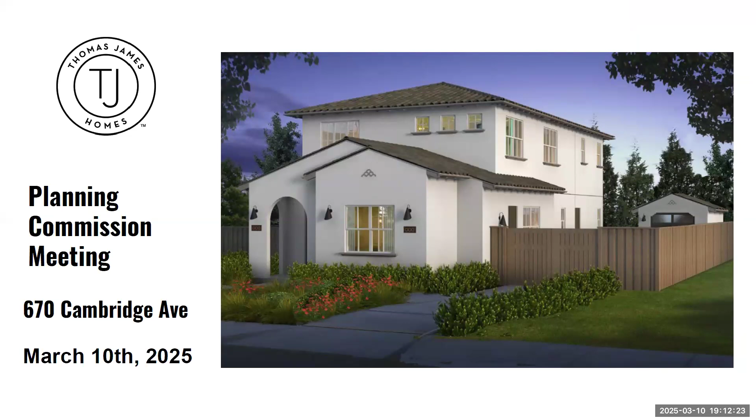Thank you, good evening to the Planning Commission. My name is Gagan Kang with Thomas James Homes. I'm a forward planning manager here. Thank you for the opportunity to present 670 Cambridge. We also have Dave Pocket, our project architect, on the Zoom call as well. Before I proceed further, Dave did want to go over one item.

Dave, are you able to speak into the mic? Is he able to present? Yeah, his microphone is unmuted, but I'm not hearing anything. Let me see. Mr. Kang, is it possible to proceed and maybe circle back? Yeah, let's do that.

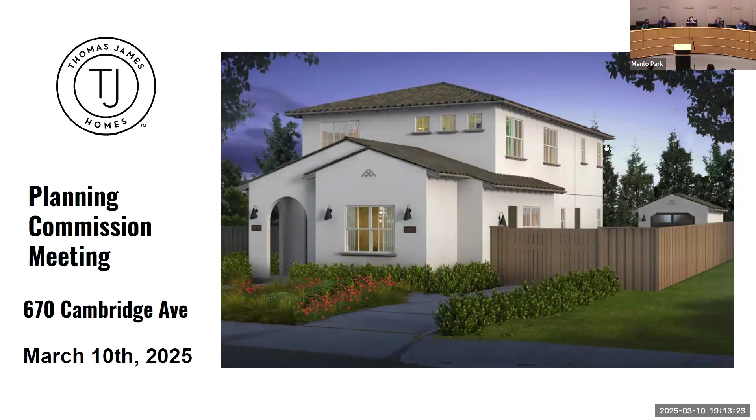Both the previous existing home and the proposed home have a detached garage, and this is commonly found in the surrounding neighborhoods.

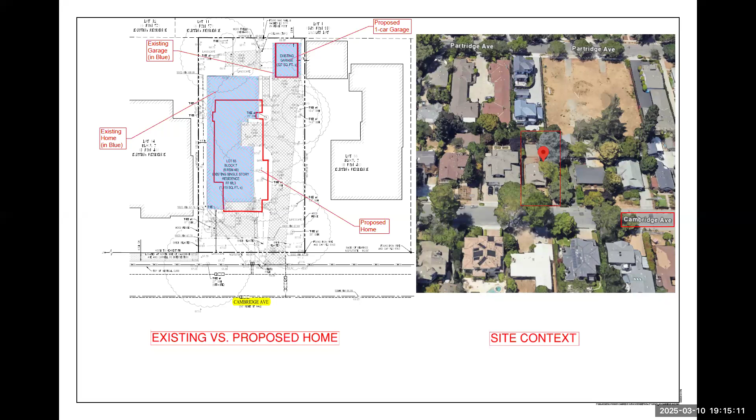As for site context, this is in the Allied Arts neighborhood, consisting of 1-story and 2-story homes, both renovated and new construction. There's a variety of materials, ranging from stucco to siding, board and batten, cedar, shingles. Several different elevations are used, such as modern, transitional, Spanish, craftsman, farmhouse, and some evolving transitional style homes that blend different elevations. There's also a mix of 1- and 2-car garages, so we wanted to copy what was existing and went with a 1-car garage here.

Apologies, Mr. Kang, is there any possibility you could move a bit closer to your microphone so we can hear you at full volume in the chamber?

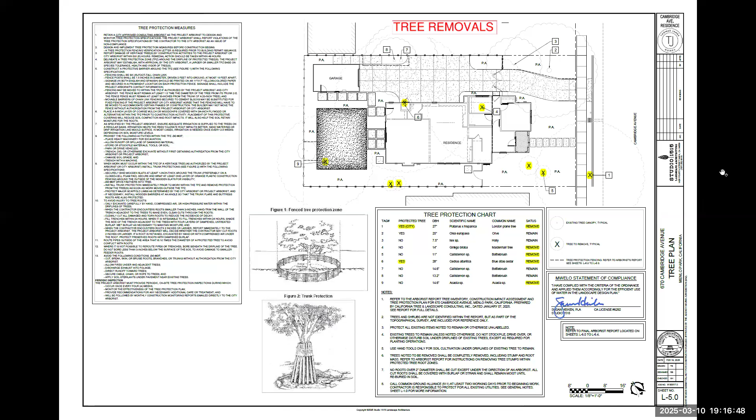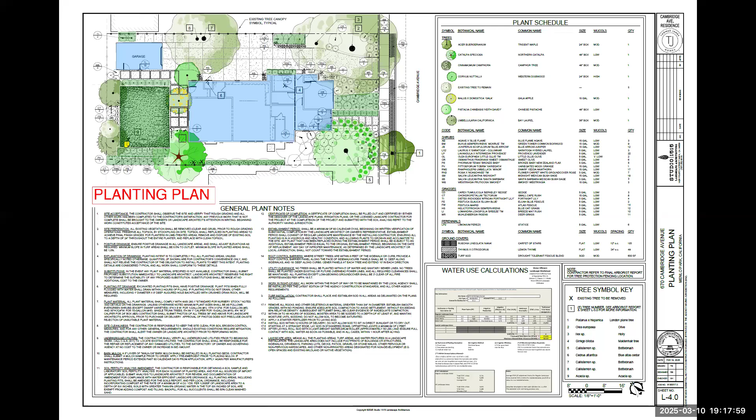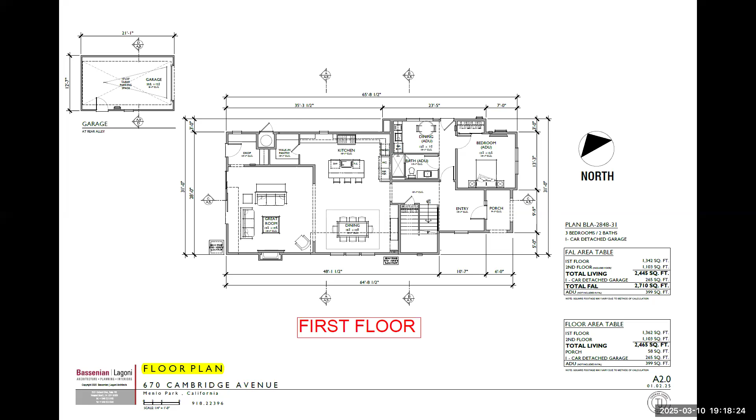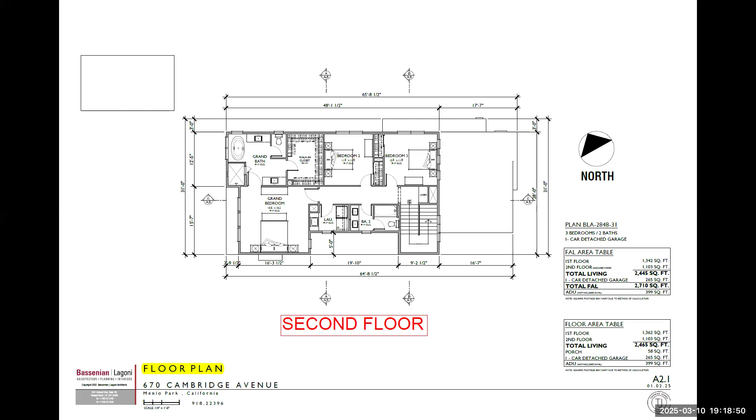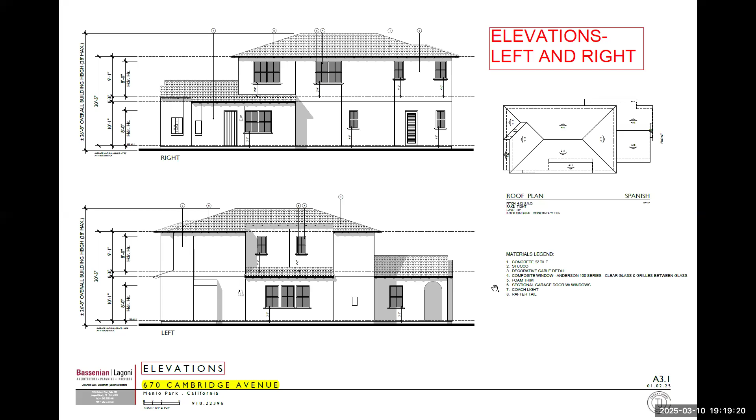At 670 Cambridge, we're proposing a Spanish style elevation, consisting of roof forms that are low pitched, both gable and hip. Overall this has an earth tone feel with the colors we chose. We are using concrete S-tiles for the roofing material.

The color palette is an off-white exterior stucco with a bit of tan to it, and a tad bit warmer brownish gray for the trim. Given the surrounding homes and neighborhood, we believe that this home proposed at 670 Cambridge goes well with the neighborhood.

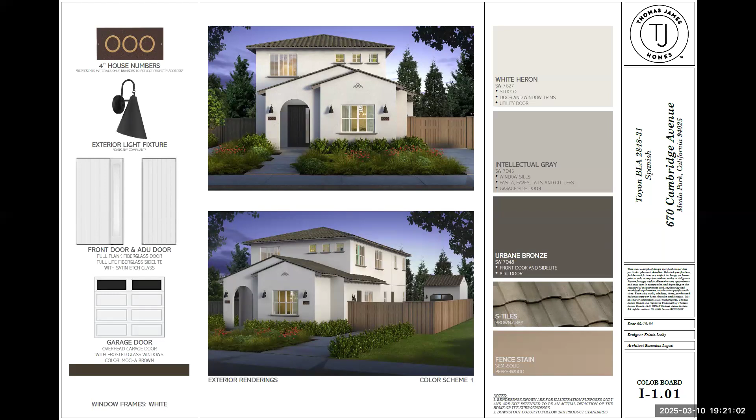And so that concludes our brief presentation. Myself from TJH and our project architect, Dave from Bassenian, are here to answer any questions you have.

Hopefully Dave's mic works now, and if not, I'll try my best to answer the questions. Can we try one more time to get Mr. Pocket on the mic, just so we can have him available for questions? Mr. Pocket, are you able to unmute your microphone?

Well, if it's okay with you, I can read his correction. There was a little correction we had to make. Quote unquote: I found a typo on our FAR on the floor plan sheet and the floor plan calculation sheets. The correct FAR of 2723 square feet is on the cover sheet. On our floor plans and square footage calculations, the total FAR is listed as 2710, which is incorrect. I found that the square footage polyline had taken out the water heater by the kitchen, which was an error. Again, the correct 2723 square feet proposed FAR is on the notes of the cover sheet. The allowable FAR is 2942 square feet. We are 219 square feet under the allowable FAR.